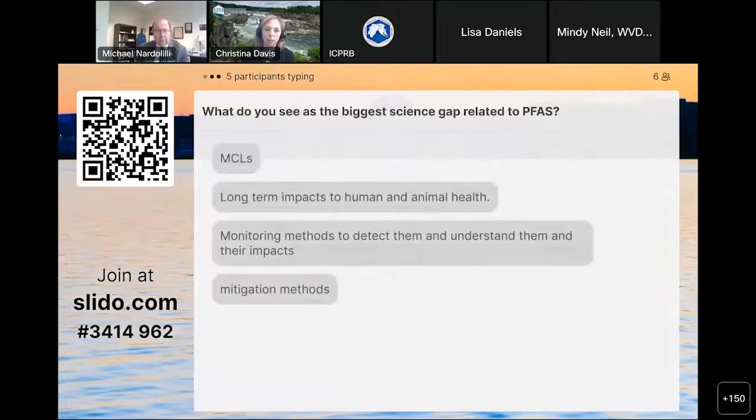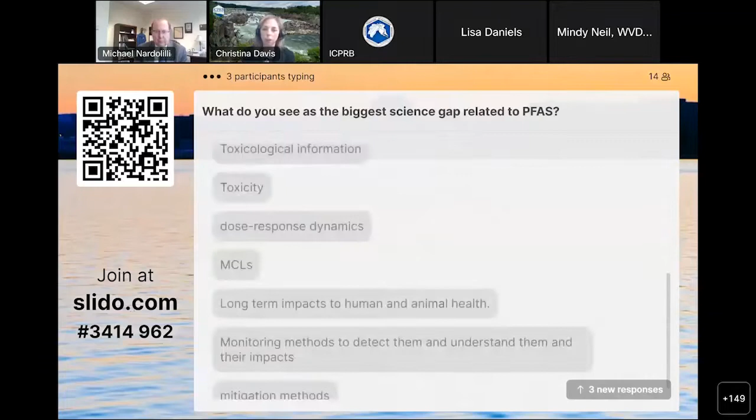Mitigation methods, monitoring methods to detect and understand PFAS and their impacts, MCLs, dose response dynamics, toxicity, fate and transport, affordability for analysis, long-term impacts to animal and human health.

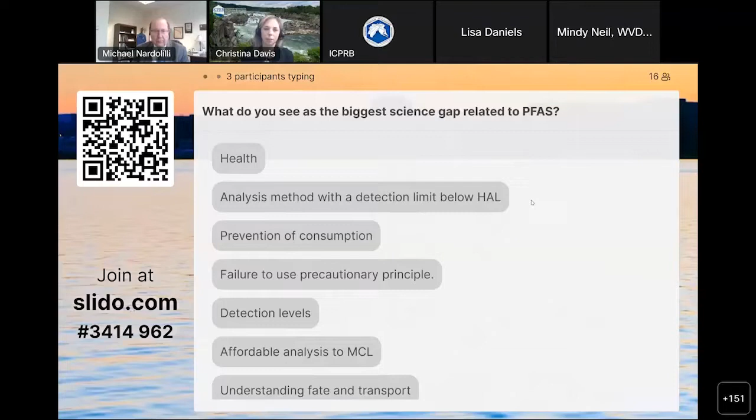Take about 15 or 20 more seconds to get your answers in if you would like to answer. Lab methods, cost-effective treatment technologies, regulations on only a few compounds when there are many PFAS.

Great. Reliable test methods. You guys are so brilliant. Lesser research on short chain PFAS, but we will have to cut it off so we can go ahead and hear from our technical experts with us today.

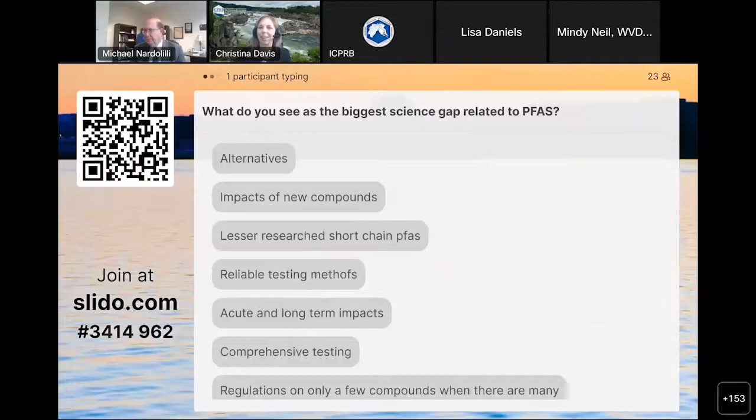Great. So as I said, this session is about addressing PFAS through technology. And with us today, we have Alice Fulmer and Rosa Gwinn.

Alice is a regional liaison for the Water Research Foundation. Her prior role at the Water Research Foundation was as a senior research manager, where her main area of expertise was contaminants of emerging concern, managing research on PFAS, hexavalent chromium, DBPs, EDCs, and risk communication.

Dr. Rosa Gwinn is the Global PFAS Technical Lead at AECOM, and with a technical foundation in solving thorny remediation problems over the past 3 decades, Dr. Gwinn recognized the need and chartered AECOM's global initiative to address PFAS in drinking water, wastewater, and the environment.

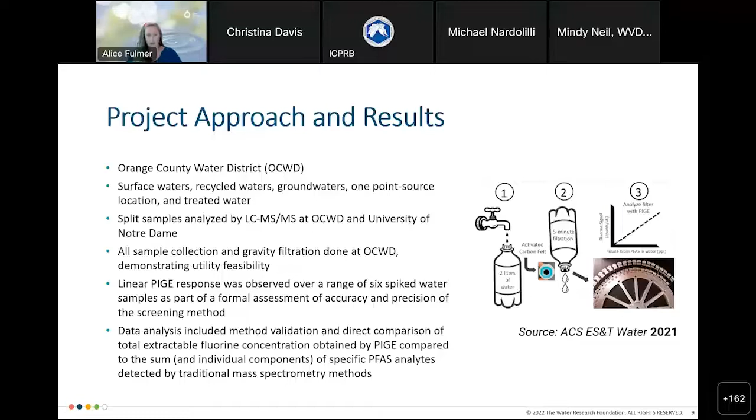They were able to see a linear response over a range of 6 spiked water samples and demonstrate accuracy and precision as a screening method. And they were able to validate the method and use it for direct comparison.

In general, while these findings are still preliminary, we do expect a report should be coming out fairly soon. We have a draft, I believe. But they did find that they could use this to look at total organic fluorine.

They were able to do that by doing some comparison with the individual measurement methods, as I mentioned before. They did do some pre-treatment of samples using Fenton's reagent and adjusting the low pH to avoid fluoride, in order to use this in real world samples. The limit of detection that they found was 38 parts per trillion with a precision of less than 20%, so that's good.

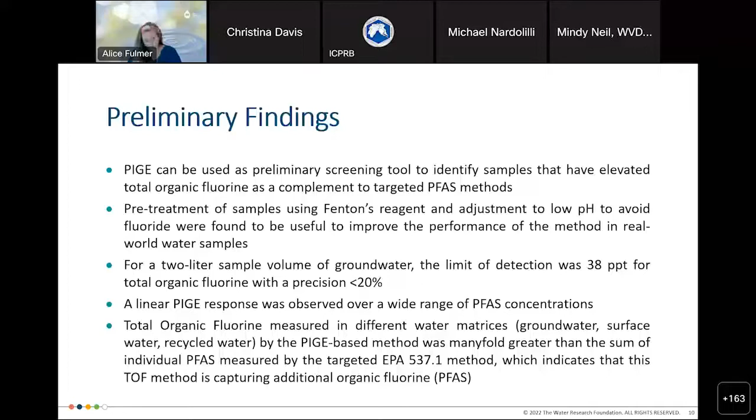Again, they found that linear response and were able to use it in different types of matrices. So this is very encouraging. Hopefully we'll have a report that we can share with you soon. Let's move on to the next slides.

As I mentioned before, we have a number of projects related to treatment. This is where we actually already have a couple of projects that we've published in the past. I'm going to highlight a couple of them here just for the sake of time, although certainly there are several that are doing some really great work here.

The reason I highlight those two is that this is a table from a past project that you see in the top right corner. What I think is worth noting here is that if you're just looking at PFOA and PFOS, we're not getting removal with traditional or conventional treatment. As you know, we do see it with NF and RO, but we're kind of getting incomplete removal with ion exchange and GAC, which are being touted as some of the best available technologies.

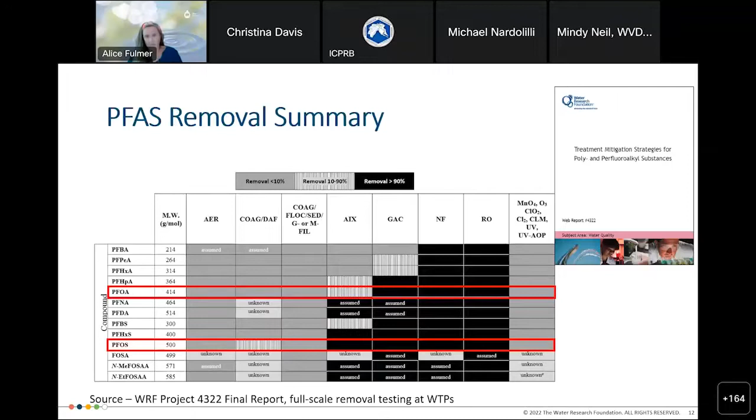This table starts with the lower chain and low molecular weight compounds at the top and moves down to higher ones. As someone in the chat alluded to, we just don't get as good removal of these short chain or lower molecular weight compounds. That's why we funded a couple of projects here, one of which specifically is titled Investigation of Treatment Alternatives for Short Chain PFAS.

We actually funded this project around the same time that we got a grant from the Department of Defense, which was to look at life cycle comparison and evaluation of ex situ treatment technologies for PFAS in groundwater.

We have, you'll see a few of the PIs are similar between the two projects, which is great. So they've been able to coordinate really well. These two projects are complementary, and both are wrapping up and hope to have something to report soon.

Here you see a little bit more information about the short chain project. It is intended to develop a guidance manual, and it's doing bench, pilot, and full scale of both existing and emerging treatment processes. I'll give some high-level results for both GAC and ion exchange.

We had 39 plants participate in this project from 16 different states, both drinking water and reuse. And definitely, they validated what we've seen before, that PFAS removal is dependent upon that PFAS chain length.

Interestingly, the empty bed contact time did not have much of an effect on the short chain PFAS removal. Basically, while you might get some PFAS adsorbing to the GAC, it then gets basically bumped off or desorbed due to substitution by the long chain PFAS.

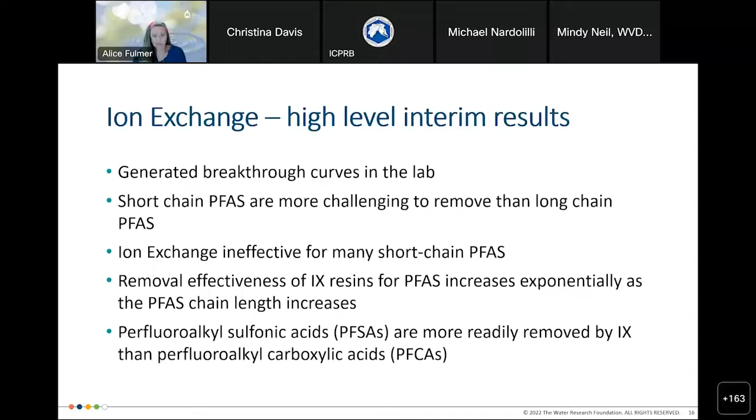Moving on to the DoD project, like I mentioned before, it is looking more at the life cycle comparison. It wanted to compare some of the more established technologies with the more emerging technologies, which include some of the destructive technologies that I believe Rosa is going to be talking about in her next presentation.

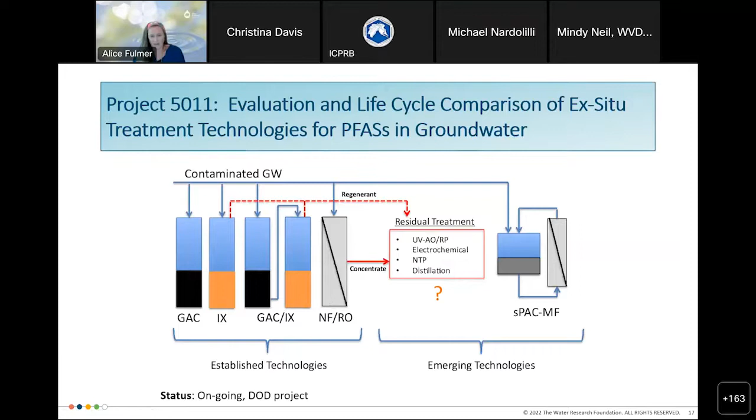So these are things like electrochemical treatment, non-thermal plasma, AORP, etc. This project is going to be resulting in a decision support tool.

We've had a couple of workshops already for this project. The tool, as I mentioned, is going to take into consideration cost, but also other stakeholder value. You'll be able to put in concentrations, treatment objectives, and look at different technologies and how they might or may not be recommended based on your stakeholder value. It might be that affordability is a top priority for you, or it could be that you want to give extra weight to environmental health or public health, et cetera. So there's a few different criteria that you can weight with this decision.

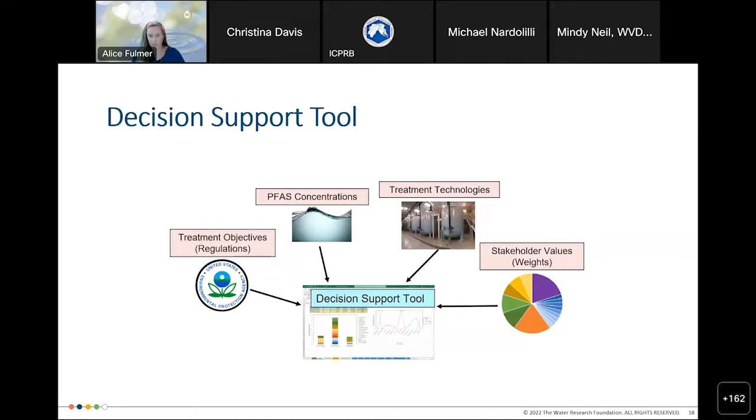Both of these I expect to be out next year. So moving on to behavior, fate, and transport.

Checking my time here - really, a lot of the concern here is with regard to biosolids. Land application of biosolids has been an amazing way to use and recycle our solids after wastewater treatment. We've got some wonderful programs in this area, great beneficial reuse in many cases, but of course there is concern with the biosolids and the concentration of PFAS and the potential release of PFAS.

So we have a few projects looking at this, many of them wrapping up. The fourth one down, assessing poly- and perfluoroalkyl substance release from finished biosolids, is actually in publication and I think should be out very quickly. There was also a webcast on that project recently at the end of 2021 that is available on our website for those of you that are interested.

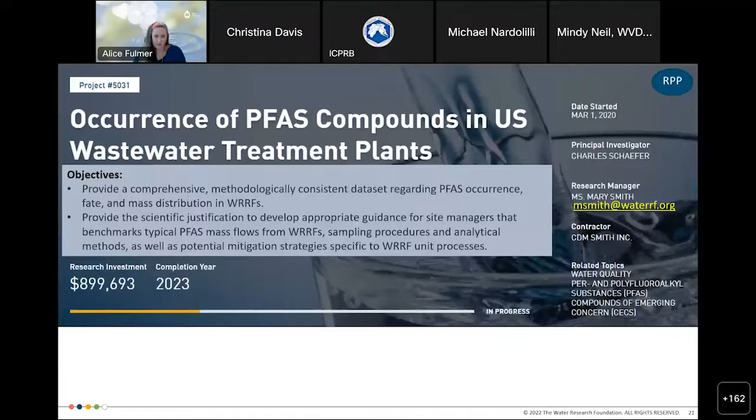But I also want to talk about occurrence of PFAS in U.S. wastewater treatment plants. This project here, which should also be wrapping up next year, just had amazing participation - we've got over 30 facilities that we were able to look at with this project.

Kind of like that analytical method project that I talked about, this particular slide was in that webcast I mentioned from late last year. We did look at both the measurable PFAS as well as, in this case, total oxidizable precursors that could eventually transform and become PFAS. This particular slide really shows you what we could measure with our target analytes in the kind of salmon and green color versus this TOP, or total oxidizable precursor content, in the teal and purple. In all cases, you see just a fraction.

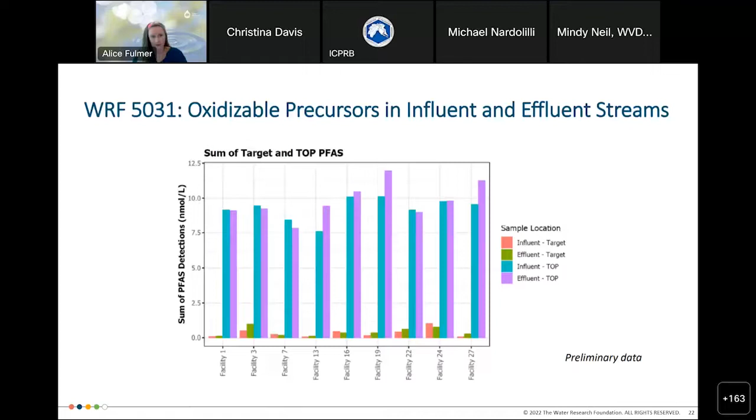In general, I will say that the concentrations of biosolids among all of those studied were really pretty equal. This project that I mentioned had the webcast and touched on the occurrence project as well, because they're both being done by Charles Schaefer of CDM Smith.

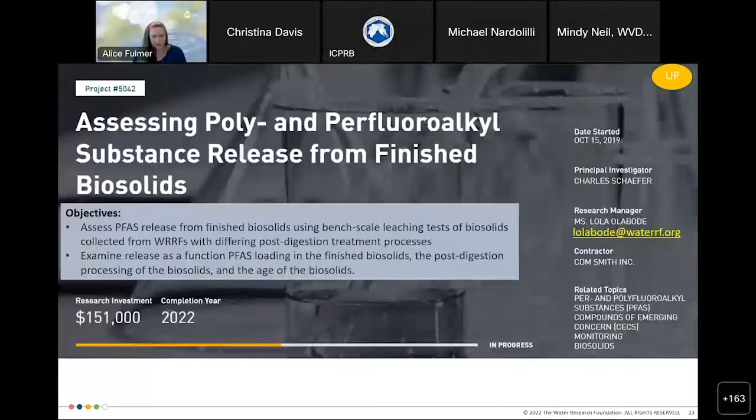It involved 7 different facilities and a study that did about 6 months worth of work. The PFAS levels, again, among all the biosolids studies were very similar. The majority of the organic fluorine associated with precursors was not currently quantified in commercial laboratories - that's what I was showing you there with the TOP assay versus the measured analytes.

The precursor transformation to perfluorinated carboxylates likely occurs during land application of the biosolids. They did find, although they used a mesocosm approach that could have represented some worst case scenario, release and transformation over the 6 months of the study. But what I think is really important to highlight here is that the extent to which the release of PFAS poses a risk needs a lot more research, further assessment.

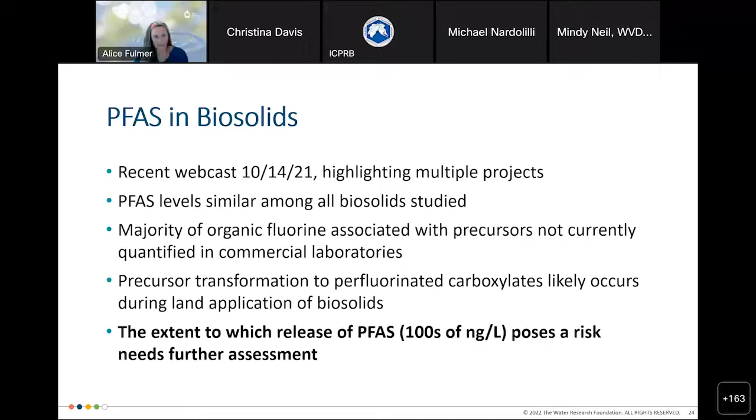Again, this report should be coming out very soon, and this issue with biosolids really underscores why we're funding - or why we funded, rather - the next two projects that I'll just highlight very quickly. One of which is understanding pyrolysis for PFAS removal.

Here we're looking at the feasibility of full-scale thermal drying and pyrolysis to remove or destroy PFAS. It seems to have great promise there. This work is being done by Hazen and Sawyer.

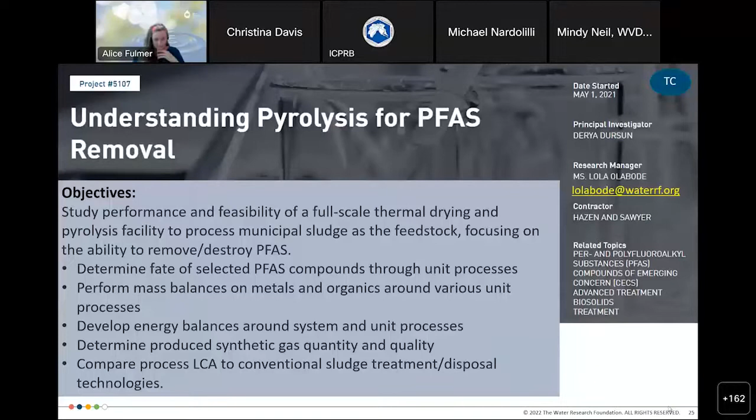And then we're also looking at incineration of PFAS through sewage sludge incinerators. This project is not quite as far along, so it's still a couple of years out before we have these results, but we really want to see if we're able to.

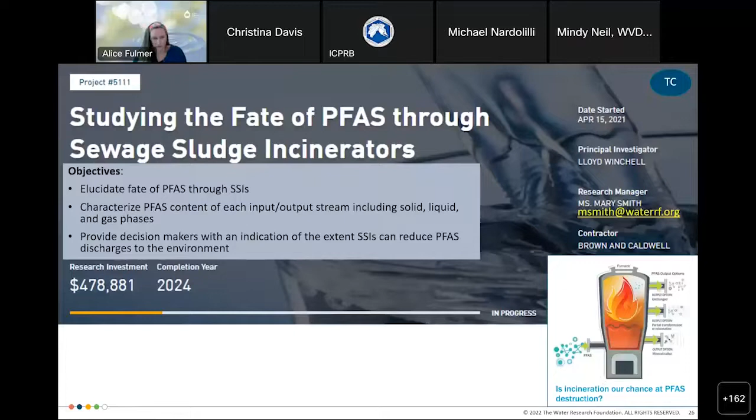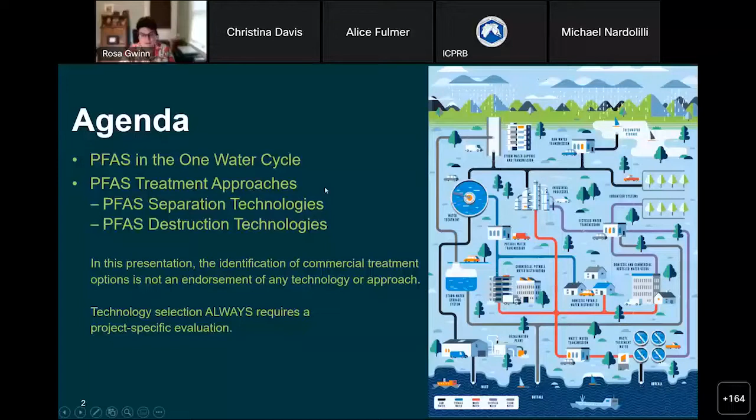So let's just briefly revisit a slide that Zach shared right at the very beginning and talk a little bit about the PFAS sources that you should be thinking about, and I know Alice just mentioned that, as did some others. You should be thinking about source control, right? It's great to nip things in the bud. Not an area here that is heavy with manufacturing, but don't forget that there's post-manufacturing.

It's not just the chemical producers, it's people who are using those products. And of course, these consumer products make their way into our households. Our households might clean a carpet or something.

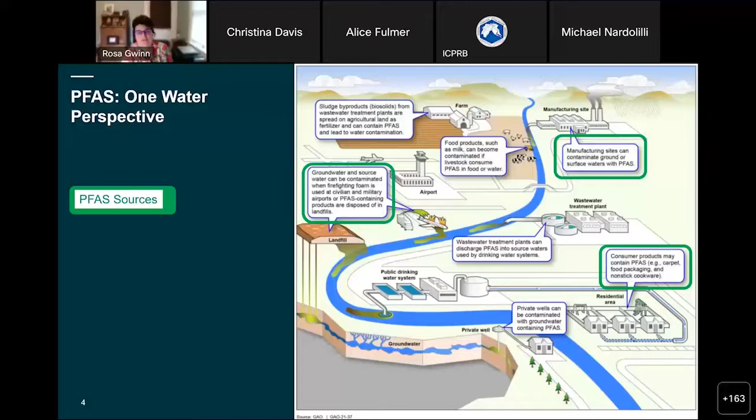That water goes down the commode, and that water can then enter into the ecosystem. And of course, we've heard a lot about landfills and airfields, whether they're DOD or commercial airfields. Most of the small ones didn't have AFFF. So those would be some sources.

And then, of course, we think about the impact from those sources, and that's another point of interceding to break this cycle here. So we see water coming into private wells, that also goes into the commode, might go into a septic field, might go into a wastewater treatment plant that could discharge to surface water. And the PFAS are going to be altered by that wastewater treatment, which you just heard Alice touch on ever so briefly.

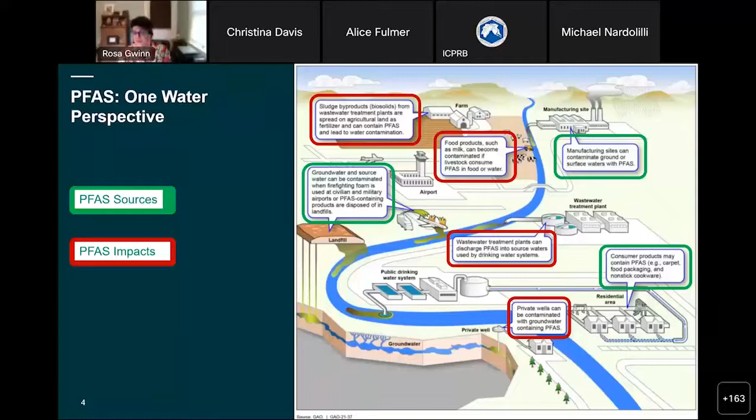Biosolids application for agricultural beneficial reuse have raised a lot of concern. There's a lot of studies out regarding what's going on with PFAS in the wastewater treatment plant, but also what's going on with plant uptake. And of course, there's animal uptake as well, perhaps from irrigation water or whatever. There's a lot of study in other countries about PFAS and the food sources.

We're not putting a human being on Mars, but we are trying to solve a pretty tricky problem. So that's what we're after, this actual system proven through successful operations. It helps to just kind of assemble our thoughts around this.

And we spoke a little bit about ex situ and in situ treatment. In situ is really geared more towards these environmental concerns. And then also I've shared in this matrix separation technologies and destruction technologies, right? So we just sorted these around here.

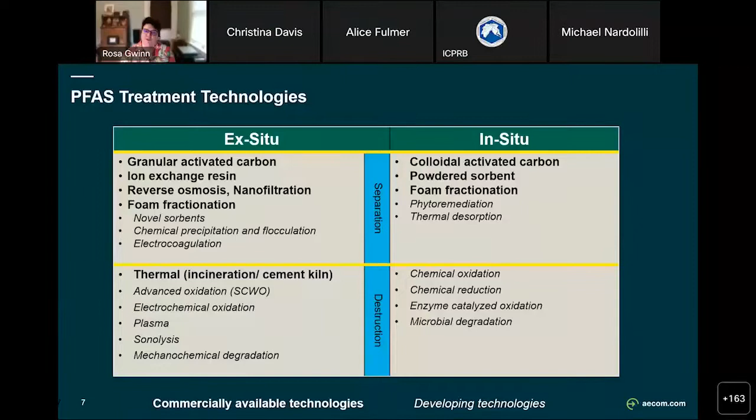We have to think about a treatment train, okay? So you have on this chart technologies that are probably familiar to a bunch of people on this call, things that you're using. Let's see how maybe we can put this all together for something kind of good. So let me take a moment—I'm a visual person, forgive me if this is kindergarten for other people.

Imagine, if you will, a PFAS laden waste stream, liquid waste stream in this case, being treated with granular activated carbon. And we heard just a few minutes ago about some of the challenges in the universe for capturing short chain compounds and some of the inadequacies of GAC, right?

So GAC can certainly grab onto some of the bad actors that we're concerned with. It's not terribly efficient, and it's not 100% efficient in doing that. And then that GAC itself, with the PFAS and all the other things, the metals and the solids and all the other stuff that's in your wastewater that clings onto the GAC, and by the way, keeps the PFAS from glomming on, that just can go into some sort of waste disposal mode, one of which could be destruction.

You could also have these large GAC applications, let's say, or even small, where you use them and then you reactivate them. You basically heat them up to drive off those compounds that are problematic, and then you can reuse that. Certainly not in a potable application, right?

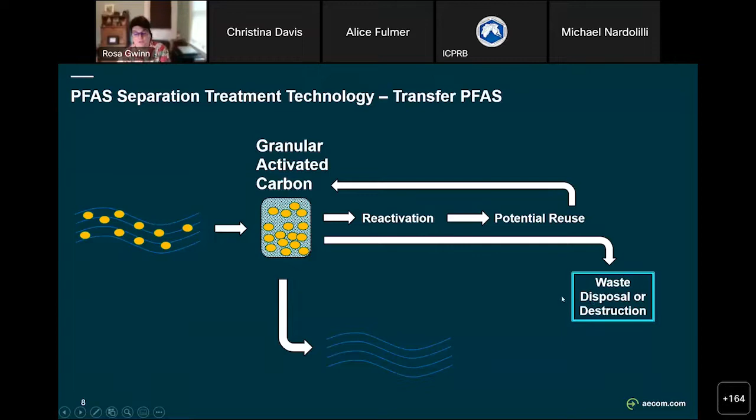Now let's look at ion exchange resins, which can be designed to be more sophisticated in their ability to extract different kinds of PFAS from this same waste stream. They have a different sorption mechanism, and they can do a good job grabbing those tails and heads of the different PFAS. Still not great with the short chains, but definitely a better situation.

You calibrate your resins to do a nice job for you. And you might have a single-use resin, maybe in an application for drinking water. And guess what? It does what that GAC description does. Those resins have to be disposed of in some fashion once they're used, if it's a single-use resin.

Or there's some regenerable resins. Now, again, you can regenerate this sorptive technology, create the regenerated resin, and then reuse it, but you cannot use it for a potable application. I just wanted to reiterate that. So we would be interested in doing that.

A lot of the regeneration sometimes involves methanol and some unusual salts. And so it creates a situation where you're not going to be using that for potable, but you could use it for other applications, right? And then you can regenerate.

And by the way, I'm going to step back a little bit. Anybody who's on this phone call is probably pretty interested in sustainability and renewability, right? And so having materials that are supposed to make the environment clean going into a landfill or going to an incinerator can cause for me some consternation, right? So let's focus on that.

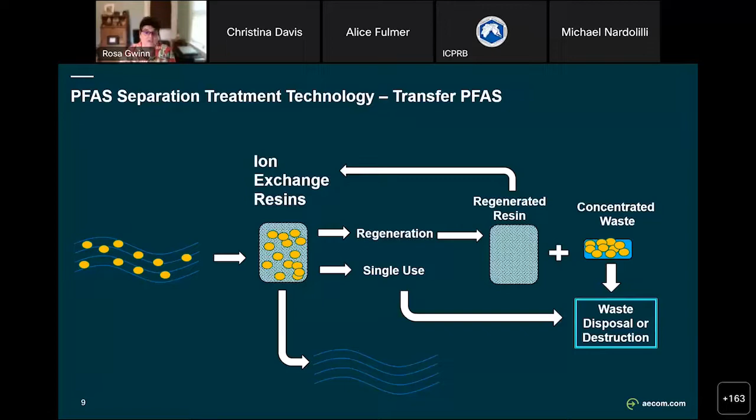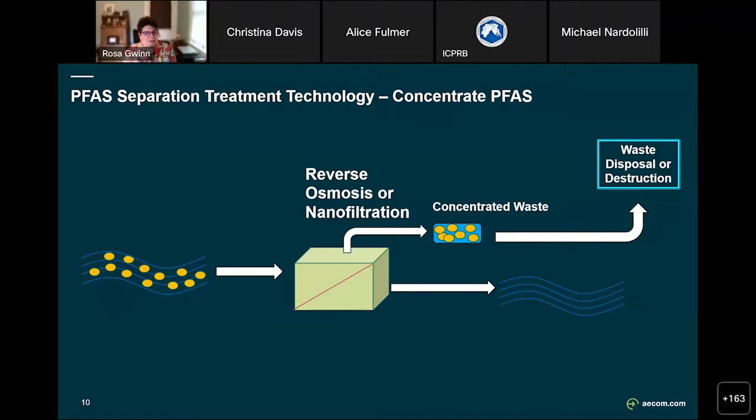So, I hope you're along for the ride with me here. I'm starting to zero in on these concentrated wastes, if you hadn't noticed.

So now let's talk about something that can concentrate selectively for PFAS. And by the way, everything I've mentioned up to now is commercially available, and so is foam fractionation. And there are different kinds of foam fractionation, but for PFAS removal, they take advantage of the characteristic of some PFAS, not all, but some PFAS, to cling to contact surfaces like the air-water interface formed by a bubble, right?

So you form bubbles through foam fractionation. The PFAS cling to those bubbles. The bubbles float to the top. It's like a delicious foam on the head of beer. You scrape that off, and it's your concentrated PFAS waste.

It's very exciting because the concentrating can be extremely effective. I should have mentioned with RO, you get maybe a 20 times concentration. If you're starting with 70 parts per trillion, I would say whoop-de-doo to go to 20 times that. That's not concentrated, that's just still super low concentration. Foam fractionation is going to be pulling off highly concentrated PFAS waste, and they are getting better at removing short chains in the foam fractionation. Ultra short chains, I don't know that anybody's been able to skin that cat.

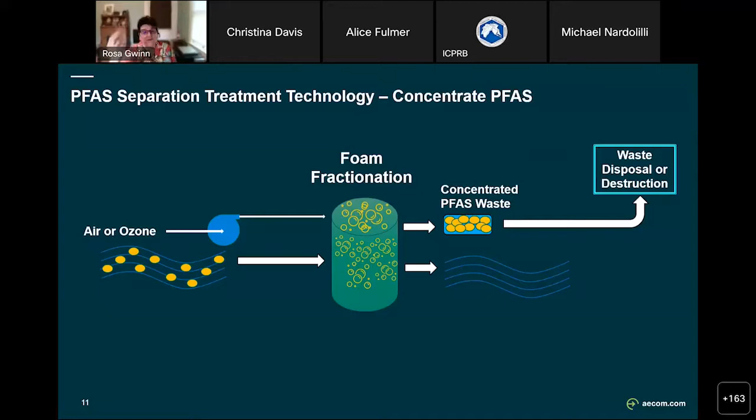So this is getting to be a little bit more exciting because we have a PFAS only concentrated waste, right? Because we're smart enough to treat all these other things. We've done that for decades in water treatment. We've treated all these other characters that are floating along in these water or liquid waste streams. But the PFAS are the thing that are causing us a problem. So if we separate them out and give them their own solution, we're doing something for ourselves.

Okay, so now let me talk to you about something that is commercially available, and that is novel sorbents that select only PFAS. It's the only thing they care about. In fact, they're calibrated to hold a PFAS molecule and pull it out, extract it from the waste stream. And so they're selective. The nice thing about these that is so terrific is that many of these novel sorbents are organically based. They're made from cornstarch or cyclodextrins, right? Just sort of biodegradable compounds, let's put it that way.

And the other interesting news for this group is there is an organization, a for-profit company, that makes a novel sorbent that has been approved for potable water use. It comes to your house, you would use it in one of your filters, different size. You can use it till it's spent, and you take it out. You put it in a package, you send it back to the company. They do the regeneration, and they take that novel sorbent and then use it in an industrial application. Single use for potable, multiple use if you can use it elsewhere.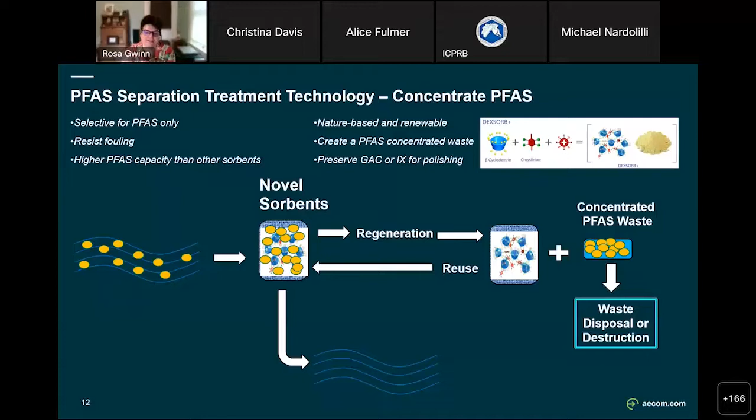So now I think you're getting with me here. We're reducing the waste, right? Because we're not just throwing away the media, and we're concentrating for PFAS only, so we can look for the sledgehammer that kills the PFAS and not waste energy on other things. So that's exactly what this graphic is showing you. You have a concentrating technology, brings the PFAS in from the waste stream. I should have shown that on the left, but I think you all have seen it now. You have a clean water waste stream, concentrated PFAS. You have to do something with that, right?

And so the EPA has a draft guidance that says, look, right now it looks like viable technologies for PFAS wastes are to landfill them, put them in deep well injection - which a lot of people don't like to do, but people do - or incinerate. And incineration is a PFAS destructive technology that many people use, and you could use it on that concentrated waste. You apply energy, terrific amount of heat, and then you get a non-hazardous, PFAS-free byproduct, whatever that might be. Now, those may have some portion that still need to go into a landfill or otherwise be disposed of. I'm not completely naive in this respect, but I do like the notion of this.

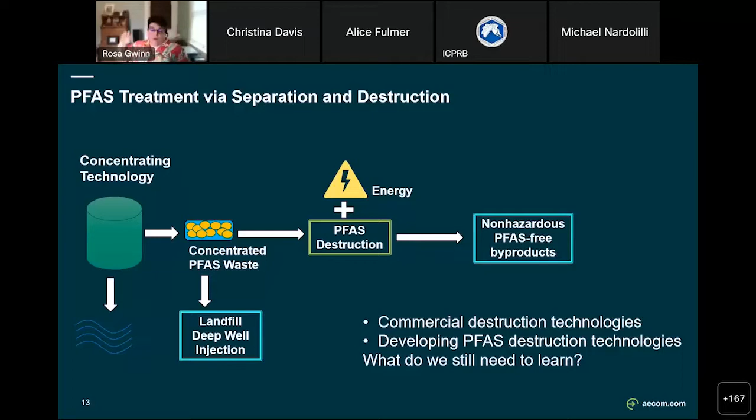So what are we doing? We're looking for commercial destruction technologies and developing PFAS destruction technologies. So what do we need to learn in order to fill that gap? What we need to do as a community is understand what we mean by PFAS destruction. And luckily for us, the DoD has engaged a group to define what that means. So before I show up at your door and say I have a destructive technology, you have in your hand this nice little checklist where you can say, yeah, but Rosa, do you do this?

Do you do this? So you don't get into a pickle, right?

So we have to have technologies that can demonstrate a decrease in PFAS concentrations. Gee, that seems so groundbreaking. No, we all understand that.

But it's complicated because remember, we have thousands of PFAS. We have precursors that will convert into the perfluorinated compounds that we can measure. So you might not measure them, and then you destroy the precursors and you make more of the regulated perfluorinated compounds, right? So you need to understand how your PFAS chemistry is changing during the destruction process. What is the transformation? What are you measuring?

And have you lost anything? So did somebody tell you that they were destroying PFAS and it ended up that they just accidentally piled it up on a filter and they just never measured the filter? Right? Because they thought, oh, well, I'm destroying it, so I'm not going to measure the filter. Right? So you actually have to think about where in this process do we have the opportunity for resorption, transfer, volatilization, even though they're not very volatile, and dilution, certainly.

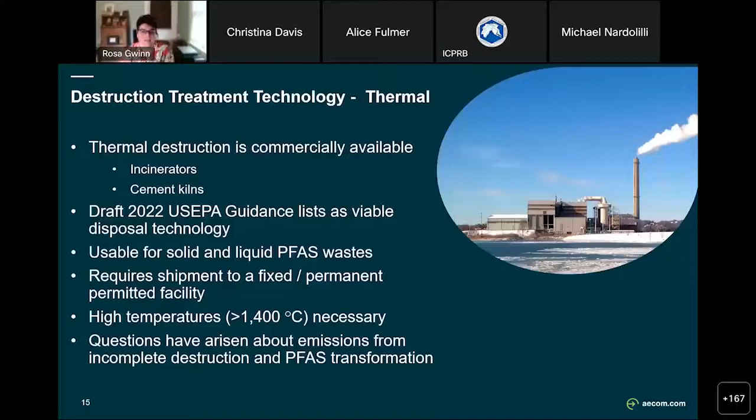Here's the rub. It's not clear what's happening inside the incinerator isn't transforming our known PFAS into immeasurable PFAS that could be just as bad for us, but we don't know how to measure them, so we think they're zero, right? That is not mass balance, that is merely transformation. As a consequence, the Department of Defense has been told no more incineration of any PFAS, right? We think those might be going out of the stack. Let's pump the brakes on that and get a better method. It does lead in the short term to more landfilling, that's for sure.

Okay, so who's funding besides WRF, which we heard earlier, doing some fabulous work? Who's just funding this destruction technology development? The big piles of money are coming in from the Department of Defense. After all, they have a hugely vested interest in getting across this, and the US EPA, whom we heard from earlier. So I thought, why not share with the group technologies that both DoD and EPA have identified as being the highest potential, the closest to technology readiness level 9 that I mentioned earlier. And so I've listed a handful of them there.

The PFAS innovation team, treatment team, has fact sheets on these 4 methodologies for destructive treatment. They do say the jury's still out on some remaining questions, if you'd like to learn more. The DoD is funding this, and I've selectively picked the ones that are further along.

So they're in this so-called ESTCP program, and we're going to talk about a couple of those. The first one is supercritical water oxidation, affectionately known as SCWO. SCWO is a method to take liquid waste, raising water above its critical point, 374 degrees centigrade and 221 bars of pressure, and the water turns into some other weird form. It's not water, not ice, not steam, it's supercritical water.

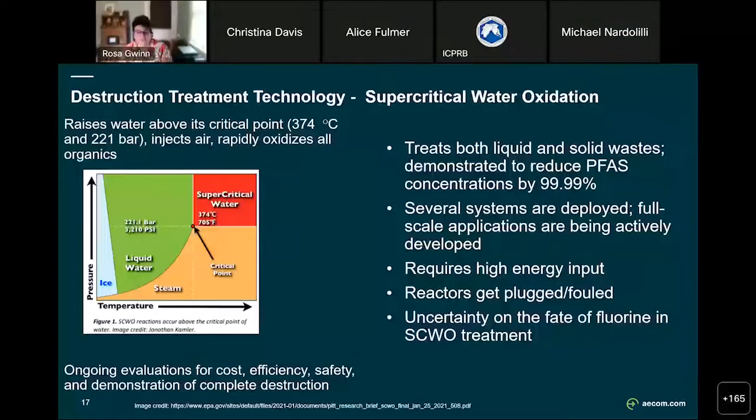The nice thing about SCWO is it works on liquids and solids. It's terrific. In fact, some SCWO methods are looking at taking the inherent energy in biosolids, so it's not as much of an energy hog. Because really, the downsides of SCWO are that there's a high energy input, they can get fouled or plugged with the strange things you create, and we haven't seen a fluorine mass balance for SCWO.

Electrochemical oxidation is another technology recognized by both the US EPA and the DoD as being fairly far along, maybe just like SCWO in the TRL 8 category. It does exactly what this says, destroys PFAS sequentially, taking off those fluorines. It achieves a high degree of reduction of targeted PFAS by moving electrons between a cathode and an anode. It's actually kind of the reverse of a battery. You're putting power into that, and that creates an oxidative state that can strip the fluorines off those compounds because there's sufficient energy.

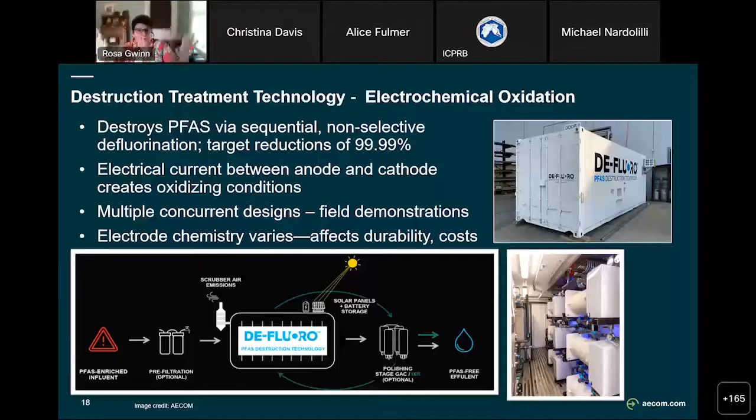There are a few field demonstrations out there. It's been through the demonstration phase, so we know both SCWO and EO work, and there are systems out there you could look at to see how they might work for you. Liquid waste only, though. Now, plasma is something I know a little bit less about.

It has the same characteristics as the others I've mentioned—there are mobile units out there trying to get to that elusive commercial scale, but right on the brink of it. Again, it takes advantage of creating highly reactive oxidizing species by putting a ton of energy into the material.

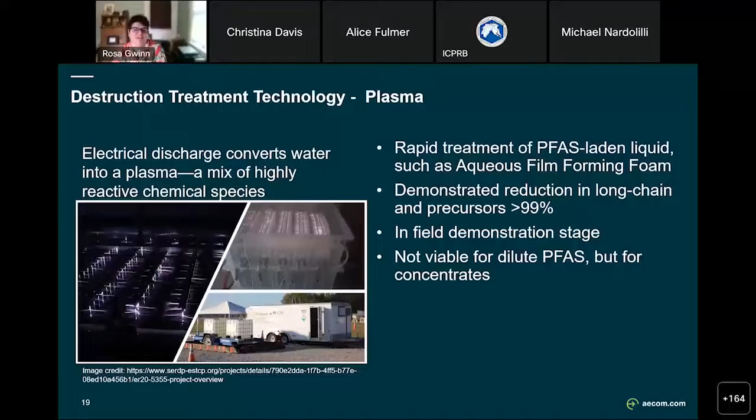It's not great if you have dilute PFAS, but as I mentioned, these things can be more efficient if you have a concentrated PFAS waste that's separated from your other waste streams. So you might use SAF, foam fractionation, or those novel sorbents to put those materials into the technologies I just shared with you. Those are out and about, and you can test them.

Now, I didn't talk about pyrolysis, partly because I knew I wasn't going to have time. But I think we can talk about that separately or later, or maybe talk amongst ourselves.

But here's the takeaway: we need to get PFAS out of the cycle. Wherever we can leverage, where we can grab it, let's grab it. Absolutely, positively protect the drinking water supplies—that's paramount, that's what the regs say, that's what your heart says, that's what you've got to do. Look at better methods than just these sorption methods. We need better methods, we need to understand them better, and we need to be able to feed the PFAS into a destructive technology. So I'm going to stop there.